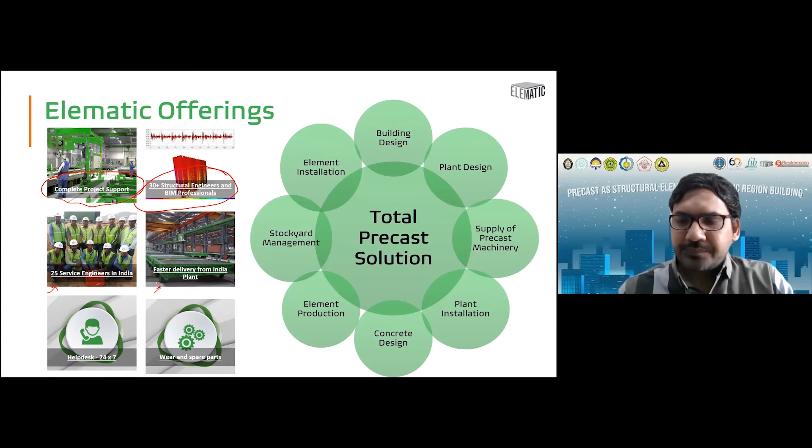Now coming to the design team strength and the snapshot. It is very important to have rich knowledge in structural engineering first, because precast construction technology is just an alternative way of doing construction. If you really look at it, we have a conventional way of doing construction, that is RCC. Then we do steel structure. Then we are using precast.

So it's a third way of doing construction. There's also a possibility of using a composite structure, which can be a combination of cast in situ, precast, or steel structure. What is really important here is that to design any building, one should have thorough knowledge about structural engineering. We have a team of very strong structural engineers who are graduates from premium colleges in India, and together we bring 40+ years of industry experience in structural engineering for all types of buildings, whether cast in situ, precast, steel structure, or a combination of everything.

We refer not only the Indian codes, but we extensively refer to American code as well as New Zealand code, which are quite advanced in terms of design of precast buildings. We also refer to European code. When it comes to design of precast buildings for seismic areas, definitely American code and New Zealand code have done a lot of research and provided a lot of literature to design those kinds of buildings.

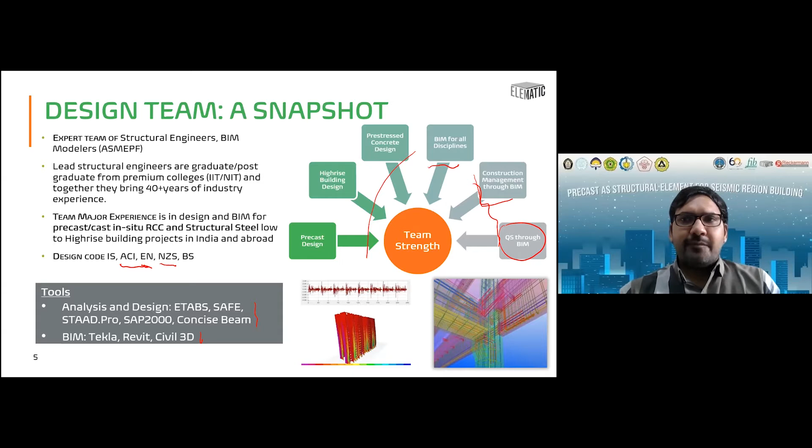And further, the design includes the quantity estimation through BIM. So further added services we are able to support to the customer, to the client, or to the owners of the project, so that they are able to complete the project within time, cost, and quality. So this was all brief about Elematic's structural engineering and design team strength.

Now I'll talk about the precast structure scheme that we are adopting in India, and also for some of the projects that we have done outside India.

So coming to the residential building. One important aspect about precast is that the precast solution is very much dependent on the type of building it is. Because at the end of the day, why somebody wants to use precast is for the speed of construction. Now, speed of construction is not only limited to the civil construction, but we also have to see the finishing of the building. So we have to adopt a method which can minimize the finishing work, and that's how the overall construction is done faster. So in a residential building, you see that there are a lot of infill walls, and that's how it makes sense to go with the load-bearing wall frame structure, where my walls will act as a gravity wall, as well as a lateral load resisting system as a shear wall.

So that's why we call it, for residential building, a load-bearing wall frame structure, where all these walls are basically load-bearing walls, acting as a gravity load as well as for lateral resistance in both directions. Then we have a slab which is spanning one way, which will just rest on this wall here and the wall here. And all my internal walls can be non-load-bearing walls, still precast, but they would be non-load-bearing. So with this, I'm able to bring more efficiency in terms of material consumption.

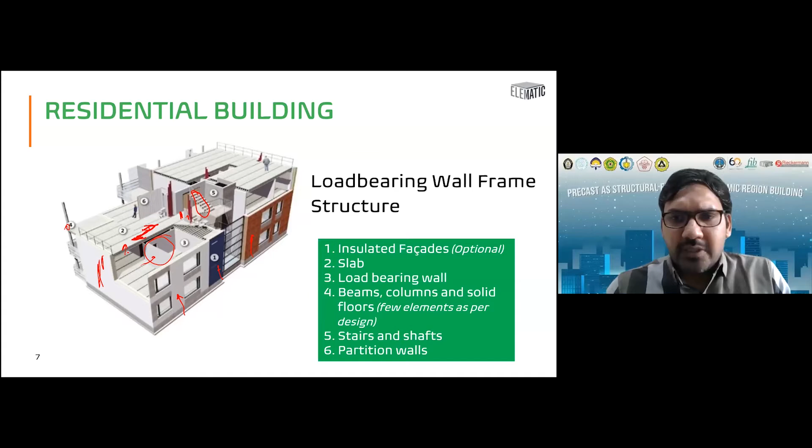So that's how it makes sense to use this kind of product, especially in residential buildings. This is a solution for residential buildings. Now I'll come to the commercial building structural framing.

I've taken an example of a project where you can see a standard layout. We always have a core area, which will be a combination of lift and staircase well, and then an office area where the span normally varies from 8 meters to 11 meters in both directions. As we see in all commercial or non-residential buildings, it's a very open kind of structure requirement architecturally.

In this kind of structure, we cannot go with the load-bearing wall frame structure because it isn't allowed. So what we normally propose is a combination of wall as well as column-beam structure. All the office areas, where the space is to be utilized, would be precast column and beam, and I'll only utilize the core as a shear wall system.

So in terms of precast elements, I would need columns, I would still need hollow core slab, and then I'll go with beams. Beams can be pre-stressed or non-pre-stressed, again depending on what kind of equipment and precast elements are available in the vicinity, and what kind of span there is. Pre-stressing definitely brings cost efficiency with respect to material saving.

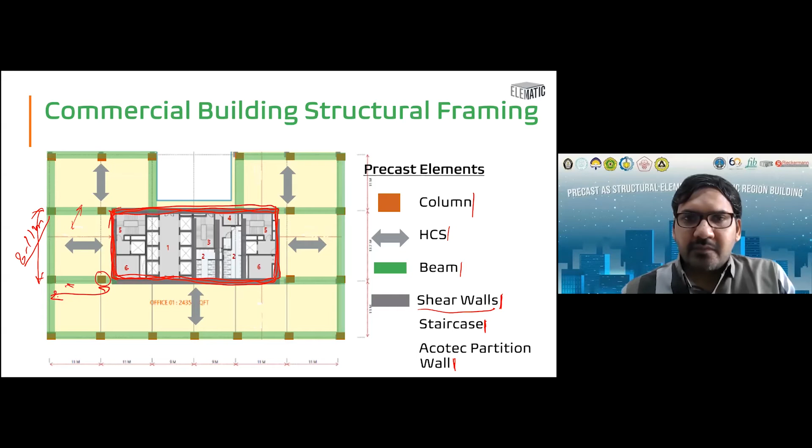Structurally speaking, in terms of how the flow of forces will happen, there are two types of loadings we have to take care of: vertical load and lateral load. Vertical load can be transferred through a column beam structure. Columns can be multi-story if it's a low-rise building, and then we have beams. All these schemes are kept in mind to achieve better speed of construction, which is the whole advantage of going with precast. We want to simplify the connections as much as possible, as per the architectural design, if it allows.

In terms of the lateral load resistance system, it is important first of all to have a very good diaphragm in the slab. This floor diaphragm has to be designed so that all the forces from the floor flow to the core area in both directions, so that I'm able to stabilize the structure laterally in both the X and Y directions.

Normally, in order to provide a very good rigid diaphragm, we go with reinforced concrete topping over and above the precast slab. That is also a requirement in some codes - it's a mandatory requirement. In India, it's mandatory to have a minimum of 60 mm RCC topping, especially for mid-rise and high-rise buildings. In high-rise buildings, it even goes up to 75 mm RCC topping.

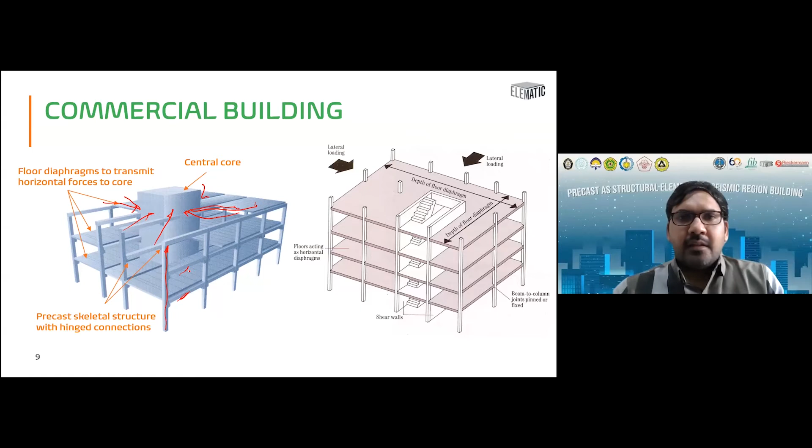Other than commercial buildings, industrial buildings also have a good amount of utilization for precast. As we have seen in industrial buildings so far, the approach is that up to plinth level we do cast in-situ construction, and the superstructure is done 100% as a pre-engineered building with steel, which also provides good speed of construction.

What we are proposing is that with the use of precast, not only are you able to save cost of construction, but also minimize the cost of maintenance of the building compared to a steel structure. So what is the solution we are proposing?

Even right from the foundation, because industrial buildings are low-rise, 1 or 2 story buildings, and in those cases where loadings are low and the soil capacity is also good, not very bad, the footing can be precast. Our footing along with pedestal can be one precast unit.

Then we'll have a plinth beam, which will also be in precast. And then the superstructure columns can be one single column right from the plinth level till the roof, done in precast.

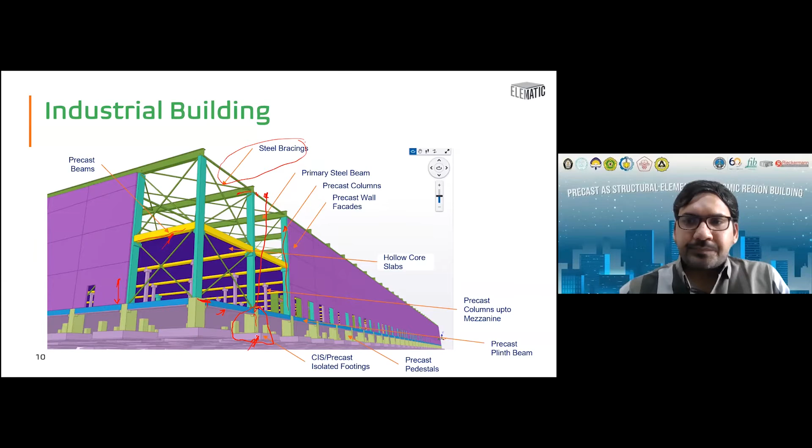So we have seen pretty much all types of building precast solutions, whether residential, commercial, or industrial buildings. Now in all these buildings, you must have realized the kind of precast elements required are only 5, doesn't matter what type of building. We only need slab, wall, column, beam, and staircase. With these 5 precast elements, you're able to do pretty much any type of building. That is the advantage with precast technology.

I'm not talking about just doing precast construction using some formwork that can normally be done for any project, like just doing the same cast in situ work offsite. But using technology like Elematic precast construction technology, you can actually have a very flexible plant which can cater to all types of projects, all types of architectural design, without making any changes to the mold. That is the kind of flexibility you get in your machinery, where you're not restricting the architectural intent or design, yet providing the structural solution. So if you have a standard precast plant, you're able to cater to all types of precast buildings and different architecture. I would say at least 90% of the architectural requirement can be served through these kind of precast plants.

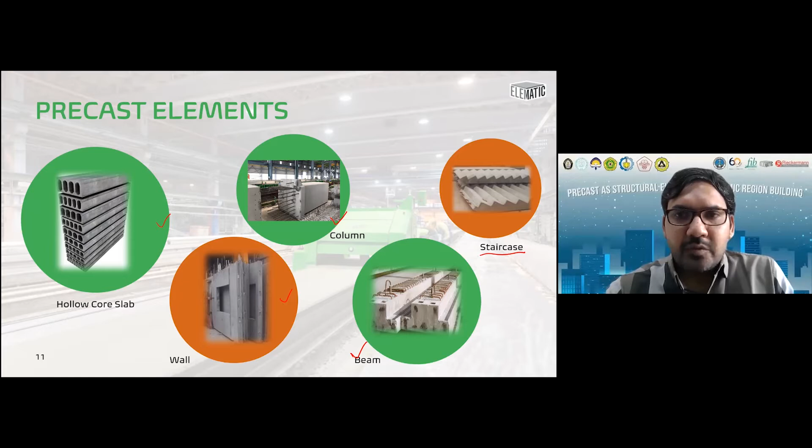Now, with respect to slab solutions, other than the hollow core slab, there's also a possibility that if it's a long car park, or for an industrial building roof, double T slab is a solution which can go up to 25, 30 meter span, or even beyond that, up to 40 meter span.

Then there is a half slab solution. If somebody doesn't want to use hollow core slab in a residential building, half slab is another solution where only the plank part is precast and the balance is done as cast in situ. This is more of an emulative approach of cast in situ slab, where you're removing the formwork by putting the formwork itself as a precast element, with props during construction, and topping on top of it, making your slab one composite site.

Then we can also have a solid slab, which is again 100% precast. So there are various slab solutions, and as per the project type and architectural intent, those solutions can be utilized. The design will also depend on the span, loading, and the availability of those kind of precast elements in the vicinity.

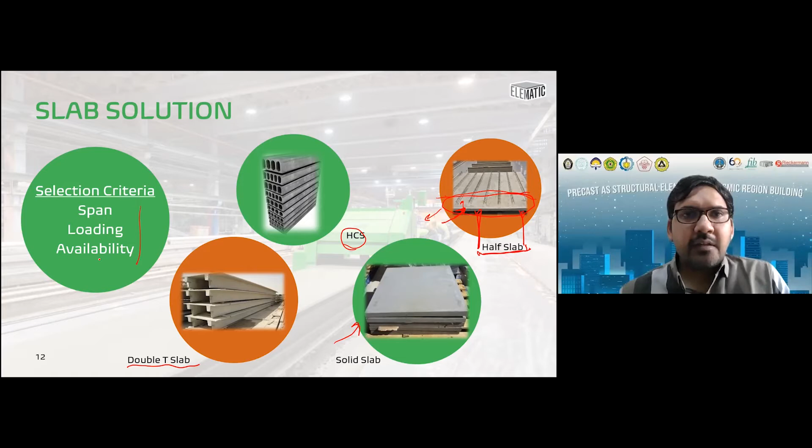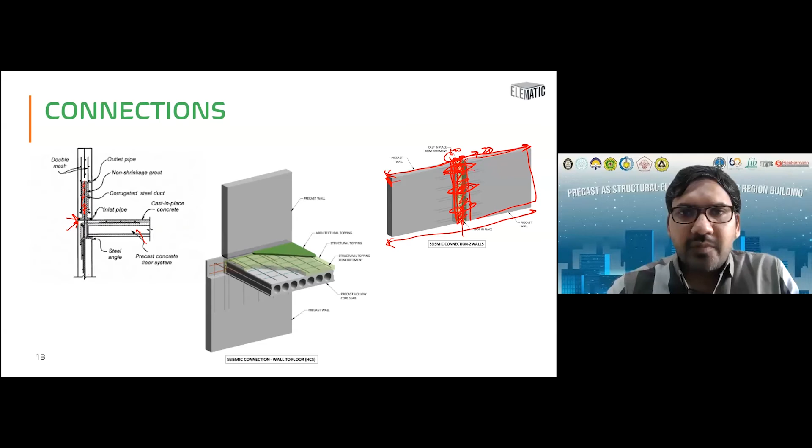Further, some more connection details with respect to column and beam. With respect to column and beam, it's a choice whether it has to be a moment connection or a pin connection detail.

Now, similarly, in case of column to column, the connection detail is similar to what we have in wall to wall connection as a horizontal connection detail: you will have a dowel reinforcement projecting out from below, and then there's a dowel tube, and you lower the precast element, do the alignment, and after that fill it with grout, and your connection is done.

Now, the other approach, if someone doesn't want to utilize these kinds of dowel tubes, especially when we talk about mid-rise and high-rise buildings, the diameter of the bar will go up to 40mm or 32mm. In that scenario, the development length also goes up, and these projections of the bar might reach in the range of 1.5 meters.

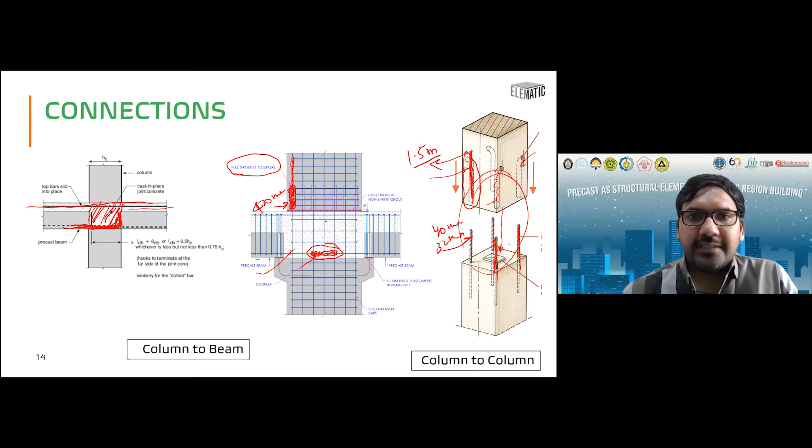Hello, Mr. Vaibhav. I think there is some connection problem. Let's just wait for a while. This is the challenge of webinars with many participants. Sorry, I think my connection was lost. Yes, please join again, Mr. Singhal. Sorry for that. So was I on this same slide? I'm not sure if I missed too much. Yes, it's this slide.

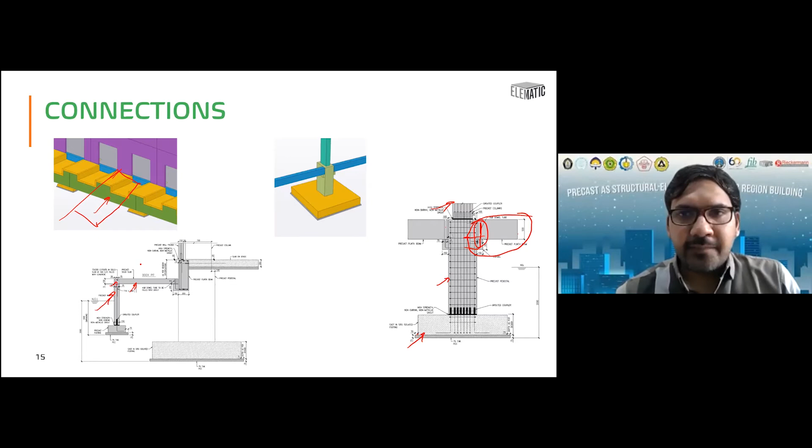This snapshot is basically from an industrial building project, where right from the foundation you start with the pedestal and then the main column. In industrial buildings, you also have storage and dock areas where trucks come for loading and unloading. Because of heavy usage of the dock area, there is a lot of wear and a lot of maintenance required. So it's better to use reinforced precast elements in the dock area with solid wall and solid slab, which ensures low maintenance of the building—it's more of exposed concrete.

So this was all I wanted to talk about in terms of the precast structural scheme for residential and non-residential projects. Now I'll give you some examples of precast projects in India.

This is a large police housing colony, a group housing project, based out of seismic zone 3. India is divided into 4 seismic zones, where zone 2 is the moderate or mild earthquake zone, zone 3 is moderate, and zones 4 and 5 are more severe. In seismic zone 3 and above, there is a mandatory requirement for ductile detailing. This project is a 4 million square foot large residential apartment project, with 60 towers under construction, each a G+14 building—so a 15-story building.

Here the precast elements used are similar to what I discussed—wall, slab, and staircase flight. In case of slab, a pre-stressed solid slab was used because that was the client's choice, as he didn't want to use the hollow core slab.

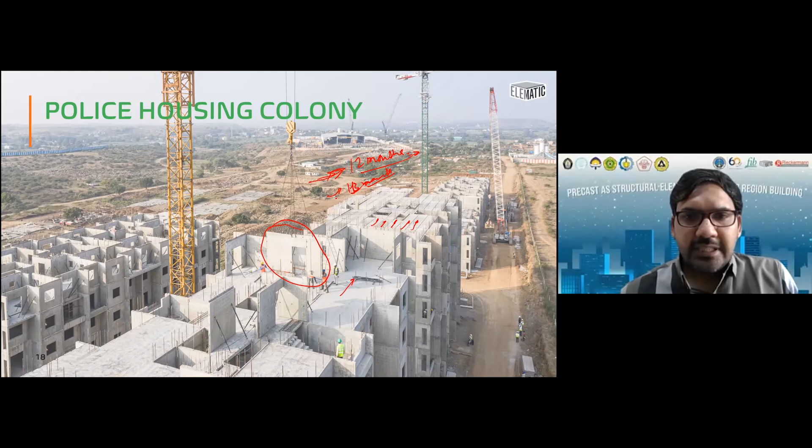Some more photos. Here also you can see they were not using couplers. You can see the large dowel reinforcement projecting out from the wall below, going inside the wall above, and that's how the precast wall construction is happening.

So what we understand is, if the building is designed well and detailed properly, then production becomes very easy. If production of elements is done well, then installation is just a Lego game, a child's game. You just have to fit the elements together and do the jointing properly, and things will go very fast. Compared to conventional construction, it's a lot easier way of doing construction.

Now there's another example of a precast building. It's 24 stories above ground, with 3 basements below ground. This project is already constructed and finished. The elements used were hollow core slab, pre-stressed beam, precast column, precast wall, and staircase flight.

In this project, the column to column grid was in the range of 11 to 13 meters, and that's how they were able to provide longer spans, increasing car parking efficiency in the basements, which is also a requirement especially in commercial buildings.

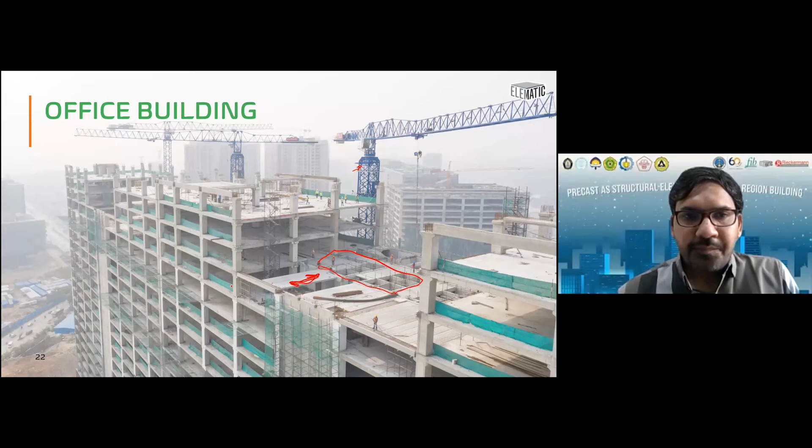Here you can see how the hollow core slab is being erected, and afterwards the topping is done. Obviously, the construction scheme is planned so that at some floors it can go up to 2 or 3 floors ahead, while at other places it stays at lower floors. So staggering of the construction is also possible. After the slab is installed, a uniform topping is done to create a rigid diaphragm.

As you can see here, reinforcement is already placed, with connecting bars projecting from the beam itself, which will be bent inside the topping, and then the topping is done.

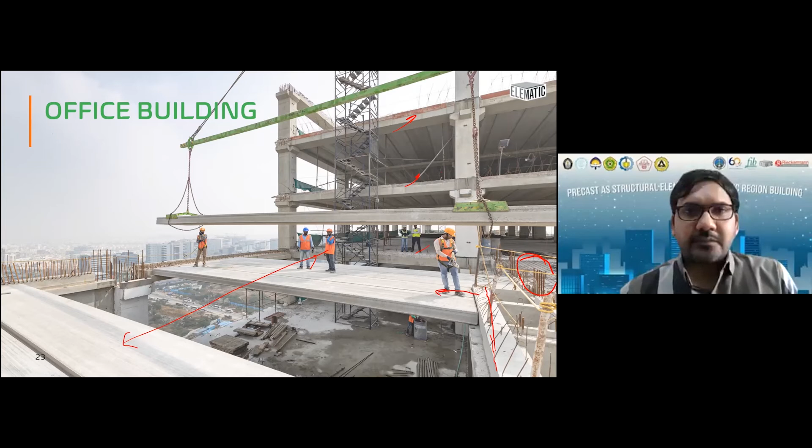This is an ongoing project we are doing right now, a 40 million square feet development happening in the south part of India, with 12 towers. The important part is it's a 43-story building - 34 stories above ground plus 7 basements plus LG and UG, so 7 plus 2 plus 34 makes it 43 stories. One tower alone is a 2.5 million square feet development.

The foundation work is already happening at site, and the design has already progressed to that level. This is going to be the tallest precast construction, a 43-story building ever done, I would say globally.

In this particular project, we are able to provide complete hand-holding support to the customer, right from structural engineering, to setting up and designing the precast plant, and also helping with production and installation. So we're providing a total precast solution to the customer, and their target is to build this project at a speed of 5 million square feet every year.

Especially in a developing country like India, and I believe in Indonesia as well, there is a demand to go with faster construction that is also quality-wise very good. At the same time, you're able to achieve speed of construction. This is a landmark precast project currently under construction in India.

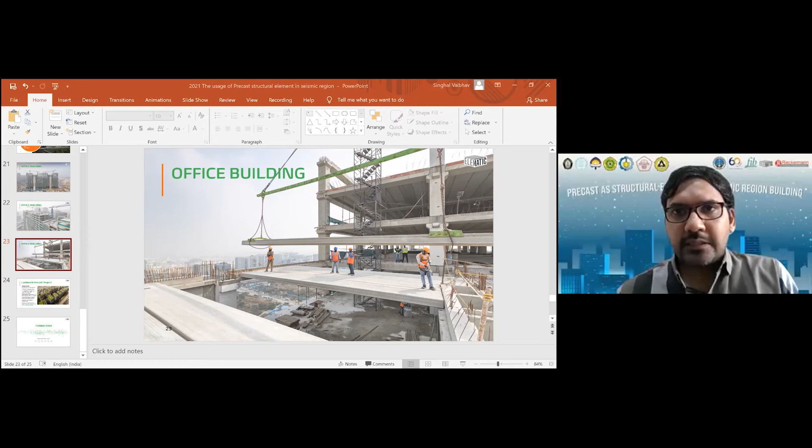So let me just play a video now. Let me know when it's visible. Not yet running, just a second. There's no sound, but I think you'll be able to hear it - I'll explain this also, and you'll also get a subtitle here.

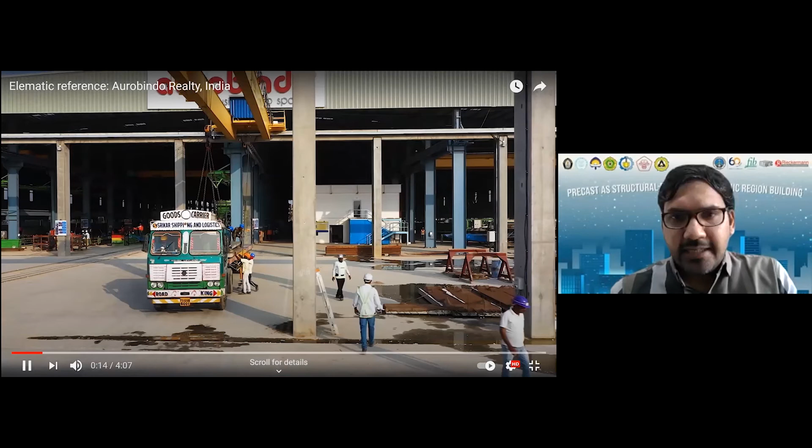This is a large precast factory we have set up in the south part of India. As you can see, there are 6 beds of hollow core slab, and they have a land area of 24 acres, with the factory itself on 8 acres. It was established in 2019, and this is the same project I was talking about, where you can see the construction moving forward.

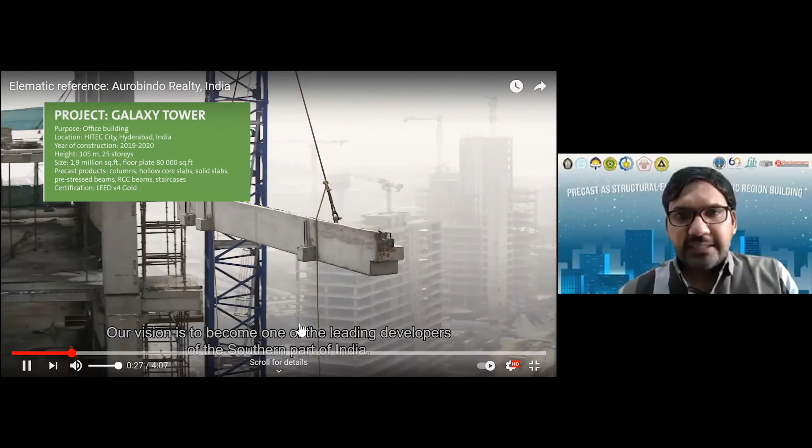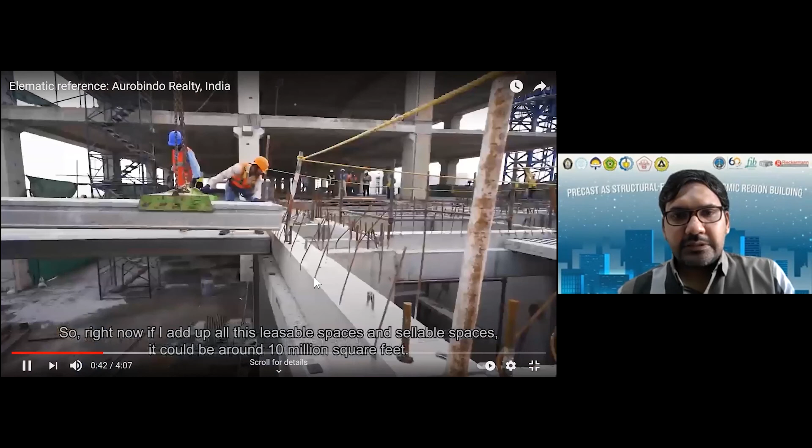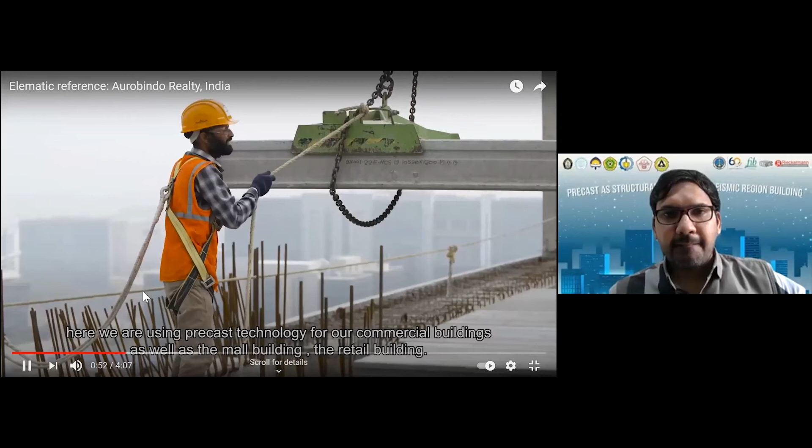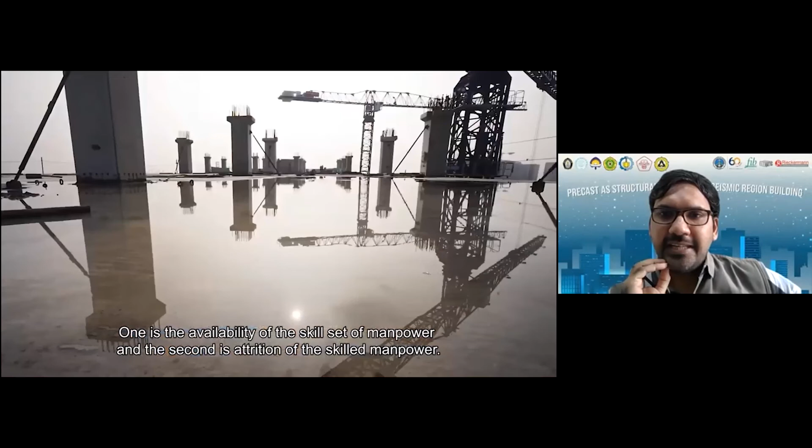It's a commercial building for office spaces - they are doing a 10 million square feet building. For all their commercial as well as mall-type projects, they are using this technology, and also in residential buildings, especially for car park areas.

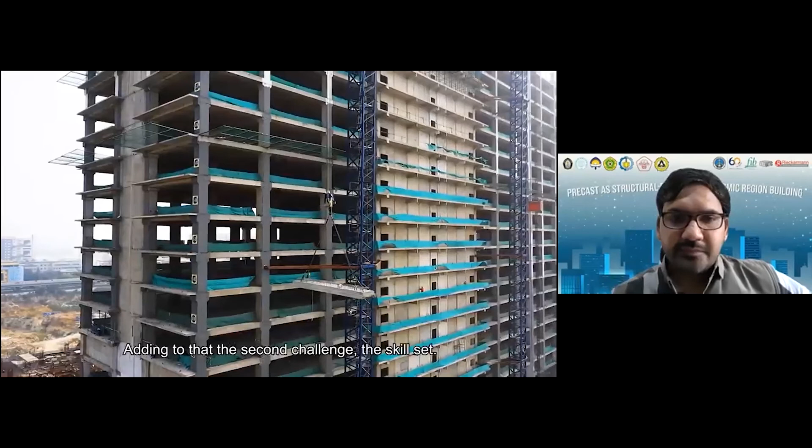This utilization of technology is speeding up in India also because of the scarcity of manpower, which is delaying a lot of castings in projects. This is a hollow core slab plant, and you can actually see how construction is done using very little manpower.

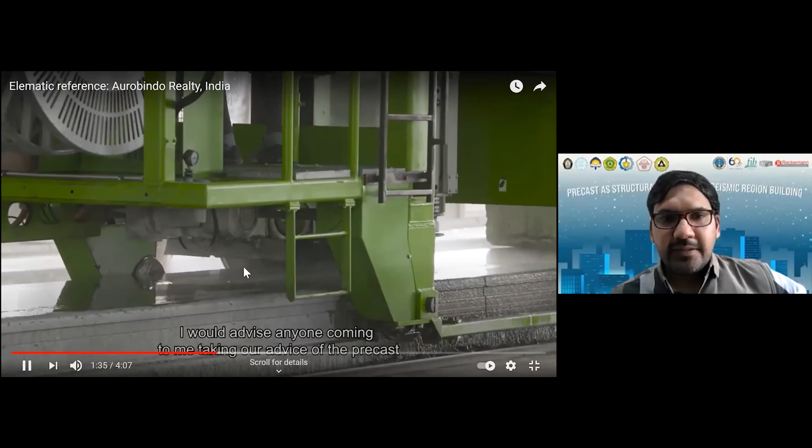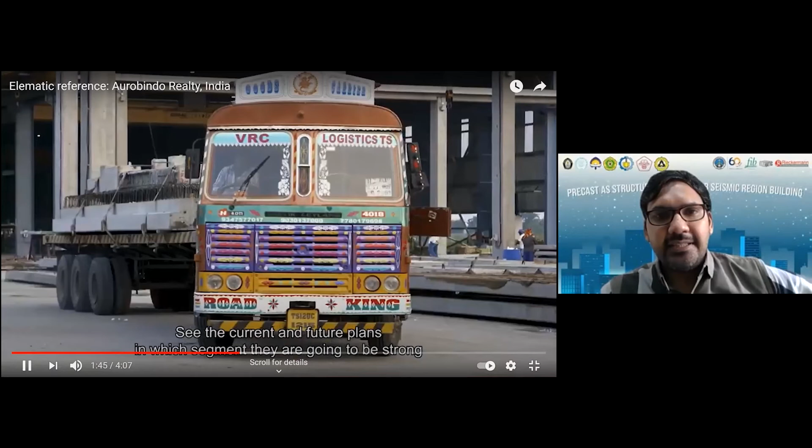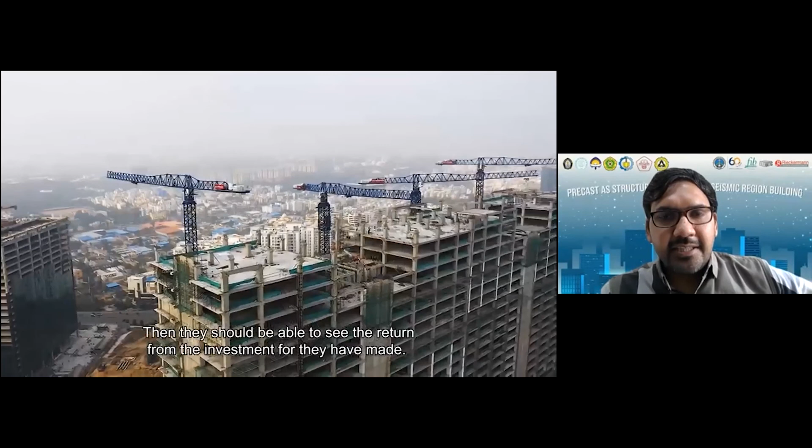This is a beam production line. They have the plant far from the site - you can see all these elements are manufactured in a very stable factory, far from the site, and they're able to cater to all their projects within a vicinity of 150 to 200 kilometers.

So this is how they're doing the pre-stressing.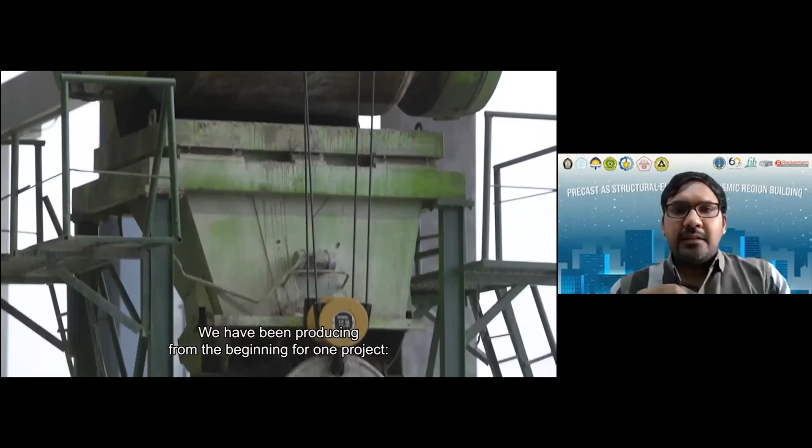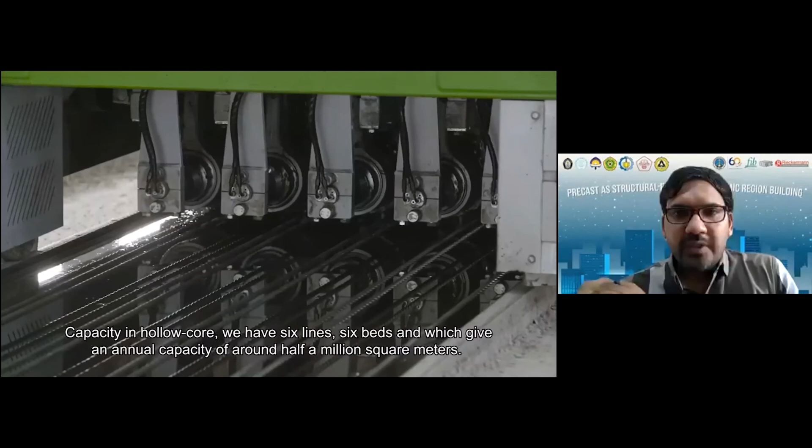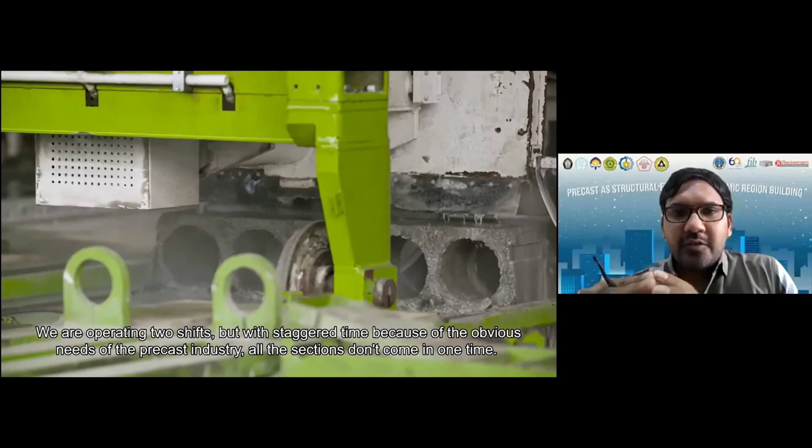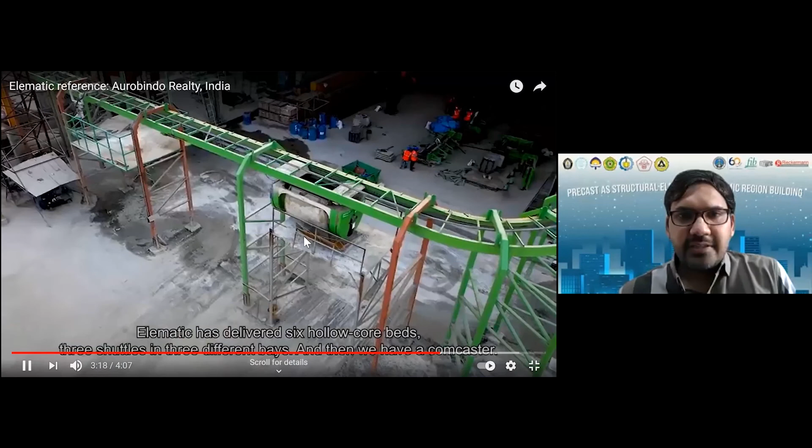With respect to the precast plant, I would also like to mention this concrete transportation, as it's more of complete automation of the factory - from the batch mixing plant, you're transporting concrete to the mold. The mold also has technology in terms of compaction and casting, which helps minimize manpower in the production facility. We're also minimizing water usage and recycling water. All these advantages come with this construction technology, allowing good concrete transportation from the mixing plant to the mold and machine.

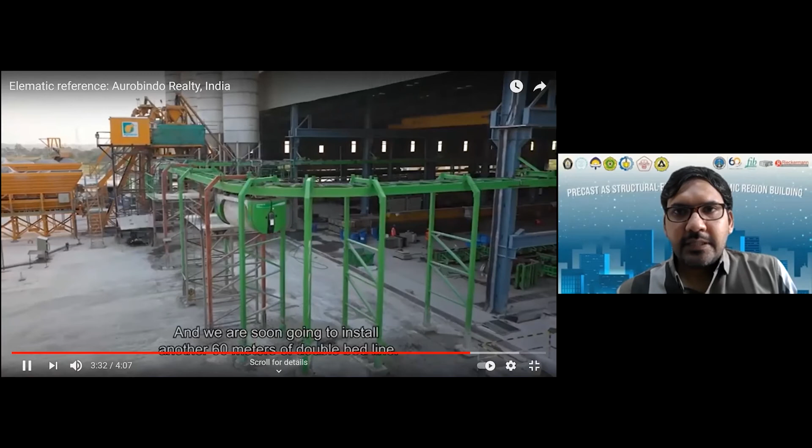We will go to the first question from Mr. Gambiro. The first question is: how are the details of the connection between the HCS and the moment-bearing frame beams so that the HCS can function as a diaphragm?

From hollow core slab to the beam, we have to open a few cores so that we put reinforcement coming from the beam inside the hollow core as well. This was also covered in Professor Hari's last presentation, and it's available in the design guidebook. We open a few cores in the hollow core, place reinforcement, and then the core has to be filled with concrete. That's how we ensure connectivity of the hollow core slab with the beam.

As far as the diaphragm is concerned, it's designed through RCC topping alone. We are not utilizing hollow core slab as part of the diaphragm, only the RCC topping as a diaphragm. I think it's very clear.

For the second question, from Mr. Christian Gilbert from PT Tata Mulia Nusantara Indah: is there any factory project using precast foundation, using precast concrete components such as mass concrete above the ground for turbine generator foundation? Because besides seismic load that occurs periodically, there's also dynamic load or vibration load that occurs inside the structures.

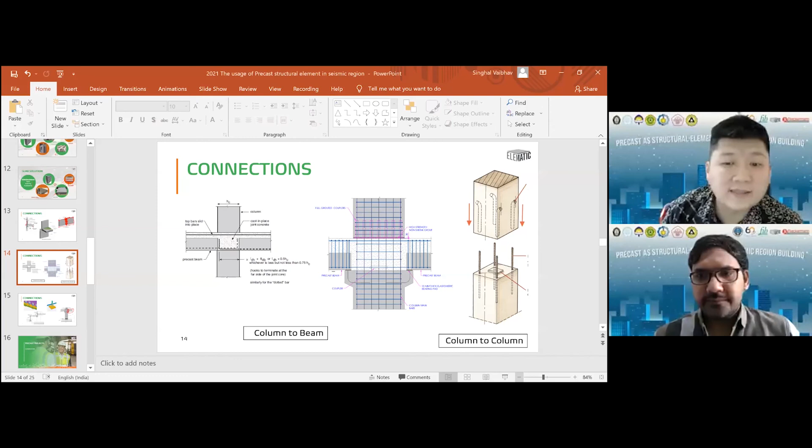Just let me know when it's visible. It's visible now, I believe, right? Yes, it's visible now.

So if I talk about this column to beam connection, you can see this is the column to beam connection detail. When we talk about it, it's a moment connection. So at the perimeter we have used this kind of connection detail where bottom reinforcement is also jointed with each other and top reinforcement is continuous. And we have used a coupler for the column to column connection.

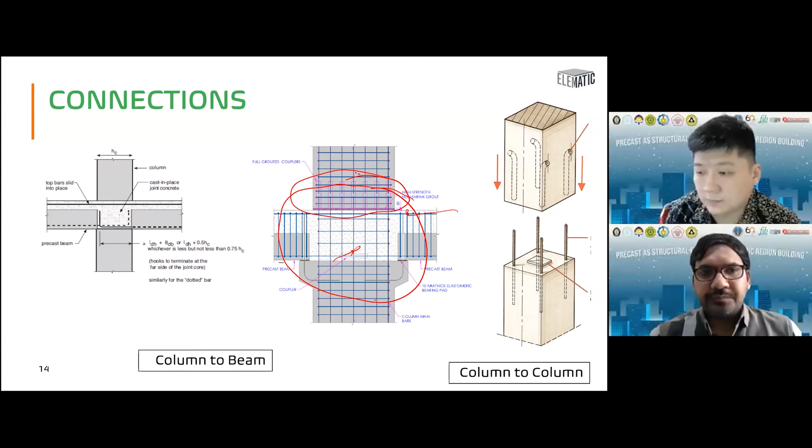While it comes to the hollow core slab, there could be a scenario where the hollow core slab is coming and resting on the wall. In the lower stories, we had actually 2 layers of dowel connection instead of just a single dowel, because the wall thickness in the lower stories is somewhere in the range of 350 to 300 mm. So when the thickness of the wall is more, in place of a single dowel, it becomes a 2-dowel reinforcement.

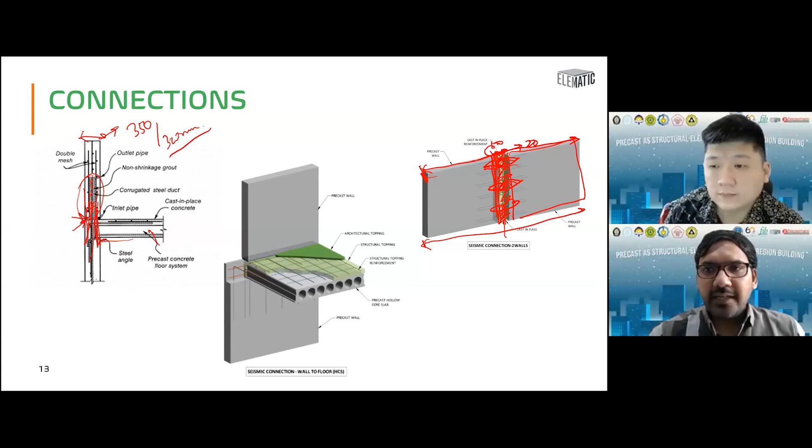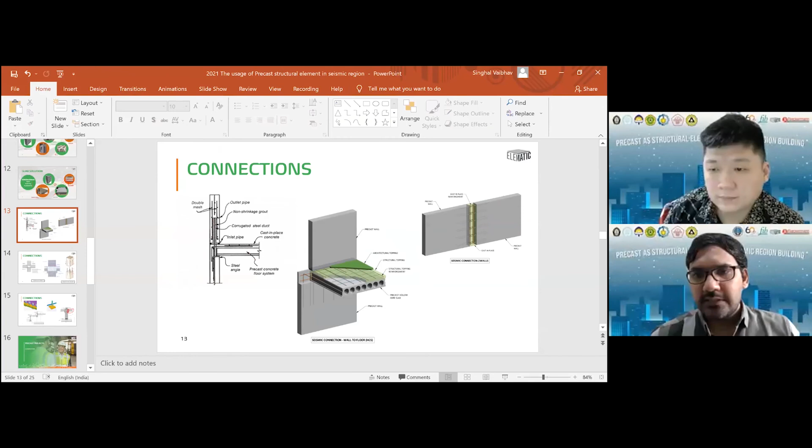Then when we had to connect this wall to wall with each other, it's still this kind of stitch connection detail. Let me just remove this markup here. Right, so this kind of stitch connection detail. And then if it's about just going with the pin connection detail, let me just remove the markup.

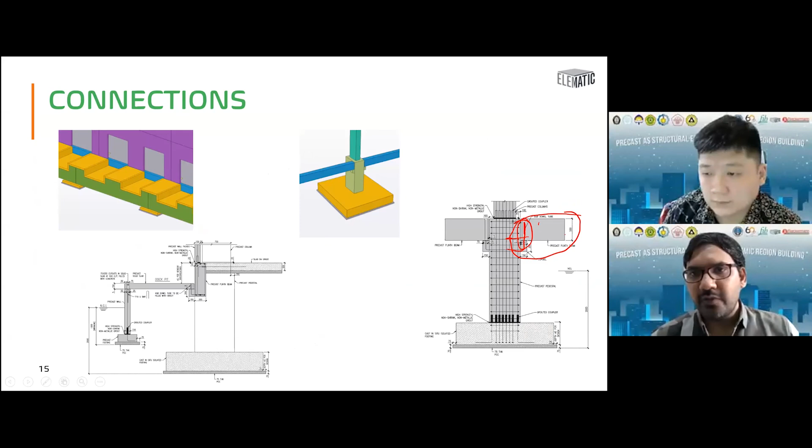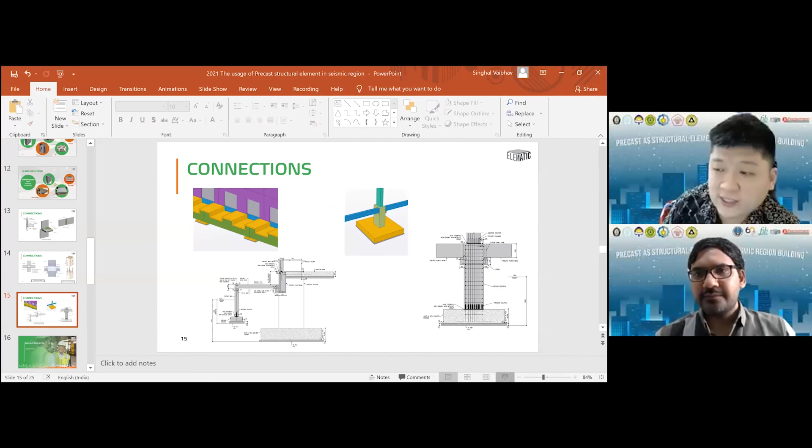Yes, I think it's okay, Professor Mr. Singhal. Another following question is: are all systems already passed the cyclic load test?

Yeah, so in our university also, the typical column to beam connection seismic test has been done, and there also the reports were found satisfactory. That's how it is well adopted. And our code does not really emphasize the emulative design approach. We can go with jointed precast elements or any other mechanical joints as well, as far as the performance is satisfactory with respect to the kind of load to be applied on the building.

So we move to the further questions from Mr. Joe from DSP: Can HCS be considered as composite action with topping slab for diaphragm? Do we need to provide detailed connection between HCS and topping slab?

You can only consider HCS along the length of the hollow core slab as a composite diaphragm, because only along the length can you consider this as a composite slab. But across the section, where every hollow core is 1.2 meter width, and between the two hollow cores there is a shear connection, across the width you will not be able to achieve composite action. So there it would only be a topping acting as a diaphragm.